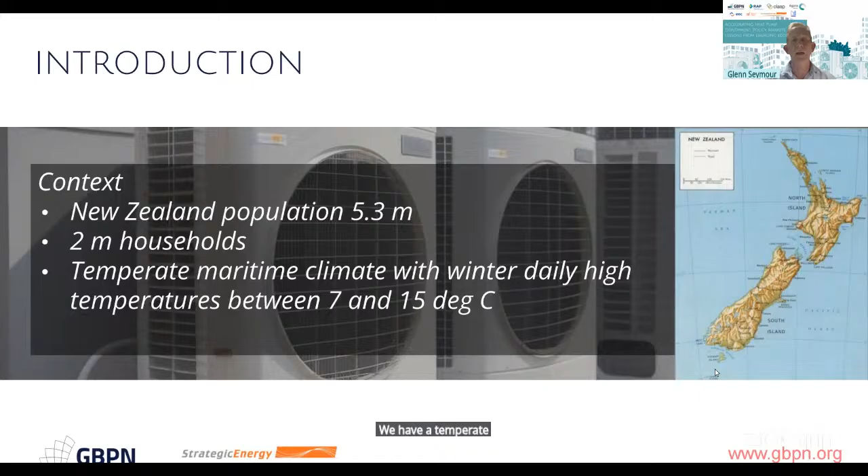Just a bit of context: New Zealand has a population of 5.3 million people spread across about 2 million households. Virtually everybody lives on the two main islands, imaginatively named the North Island and the South Island. We have a temperate maritime climate with winter daily highs between 7 and 15 degrees, and in the South Island where I live, it's quite common in winter for there to be a small frost. So yes, we do get some cool temperatures.

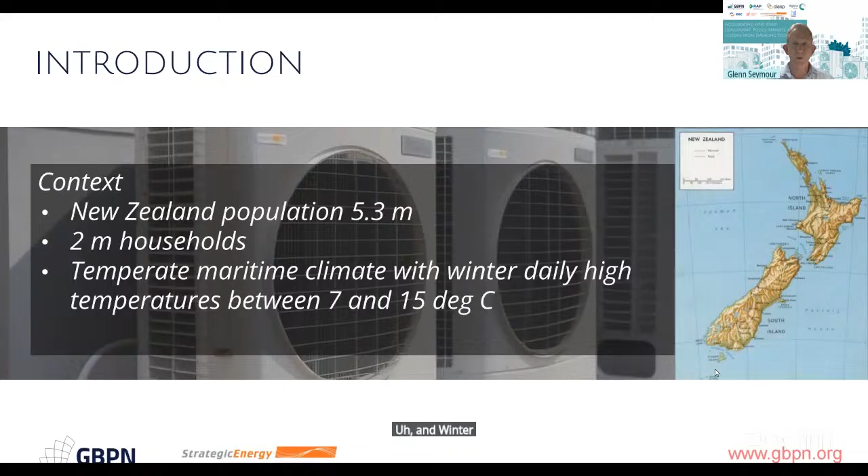Heat pumps are the dominant form of heating in the New Zealand market. We sell about 200,000 heat pumps per annum across New Zealand, compared to about 15,000 gas heaters and about 13,000 solid fuel burners. So heat pumps are well and truly the go-to form of heating in New Zealand. Approximately two-thirds of households use a heat pump as their main form of heating, and most new homes have one installed at the time of construction. This is due to the obvious energy efficiency and lower running costs of a heat pump. There have been a number of government policies, regulations, and incentive programs operating for over 20 years now that have promoted heat pumps as a clean, efficient form of heating. They're also very convenient and easy to operate.

The New Zealand market is predominantly a heating market, but in the northern parts of the country, cooling capacity is considered valuable in the warmer months. Given that heat pumps have been popular for over 20 years, we're now into the replacement market for older units that are failing or at the end of their economic life. In New Zealand, we tend to just heat the main living rooms of our house rather than having whole-of-home systems, so the majority of heat pump sales, 92%, are single split systems designed to heat one room. There's a huge range of options on the market, over 500 models across 21 different brands. Recent analysis of sales data shows the average capacity of a single split system is 5.7 kilowatts, or 12.5 kilowatts for a ducted system.

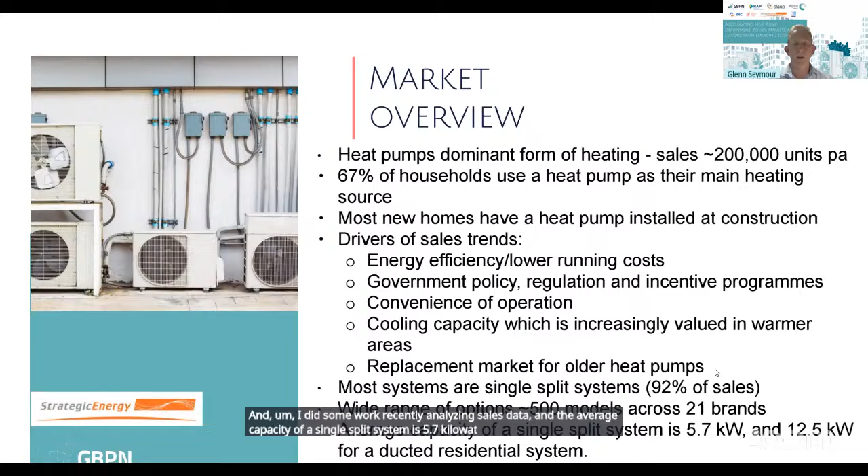There's a range of financial support available for heat pumps. Predominantly, the main source is the government's Warmer Kiwi Homes program. That's been operating for about 8 years, but there's been predecessors going back to about the year 2000. It's been focused on energy efficient and healthy homes for low-income households, requiring the home to be insulated and then to have a clean, efficient form of heating put in. There's 90% grants available if you're a qualifying low-income household, so that makes it a pretty compelling proposition to get a heat pump installed.

The home must be insulated, and the heating is for the main living room only. There's also been a number of local community grant schemes offered by a community, a charity, or an energy trust for heating and insulation. They are almost always focused on low-income households, and they typically align with the government's Warmer Kiwi Homes program and basically just offer a top-up. So in some cases, the heating and insulation is free.

A number of local councils have set up schemes around the country that I've been involved in, whereby they will advance the householder the money to install heating, insulation, solar panels, what have you, and they repay that advance back over their property rates accounts over 5 to 10 years. Those schemes are generally available to all homeowners rather than just focused on low income, and they're all similar but slightly different. And there's a new national ratepayer assistance scheme currently in development that will basically bring all those together under a single umbrella.

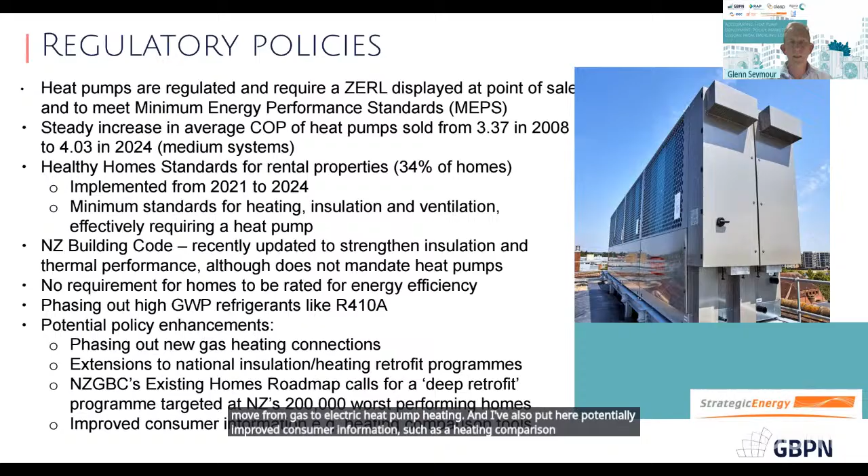There's no tax incentives available in New Zealand for heat pump installation. However, our 4 largest trading banks offer green home or warm home products, with mortgage top-ups at 0 or 1% interest rates for a few years to help install heating, insulation, solar panels, and so forth. Some of the larger heat pump retailers offer interest-free advances, typically 1 to 2 years, to help customers afford heat pumps. And some electricity companies also offer households assessments and assistance with insulation and heating.

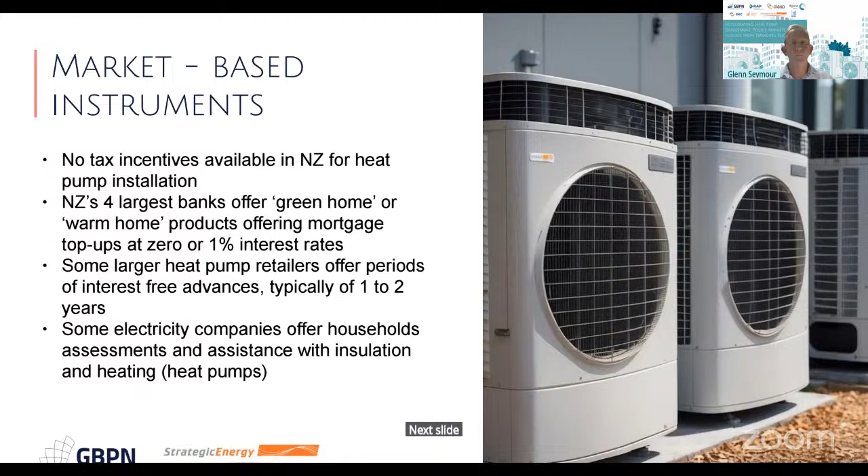The challenges in heat pumps are less than they used to be because it's now the dominant form of heating in New Zealand, so we've got a relatively mature market. But if I was to talk about barriers to purchasing a heat pump, I'd look at the capital cost. If you have to spend $4,000 or $4,500 on a single split system, versus an electric resistance heater for $100, there's a decision to be made balancing the short-term capital cost against ongoing energy savings through the much more efficient heat pump.

There have been issues in the past with poor quality sizing of heat pumps, which is absolutely critical to their performance and installation. However, the Energy Efficiency and Conservation Authority here has done good work over the last few years producing good practice guides for installation and sizing of heat pumps, which has helped address that. There's also potential challenges around electrical wiring upgrades that may be required in some cases.

The risk of power cuts is always something people have a perception of that, in my opinion, seems a lot worse than the reality. But nevertheless, it does make people think about electric heating. In some cases, if you've got an older home, it may be uninsulated, it may have a high ceiling, and it just might not be practical to heat with a 7, 8, 9 kilowatt heat pump, which might drive consumers to choose a solid fuel burner instead.

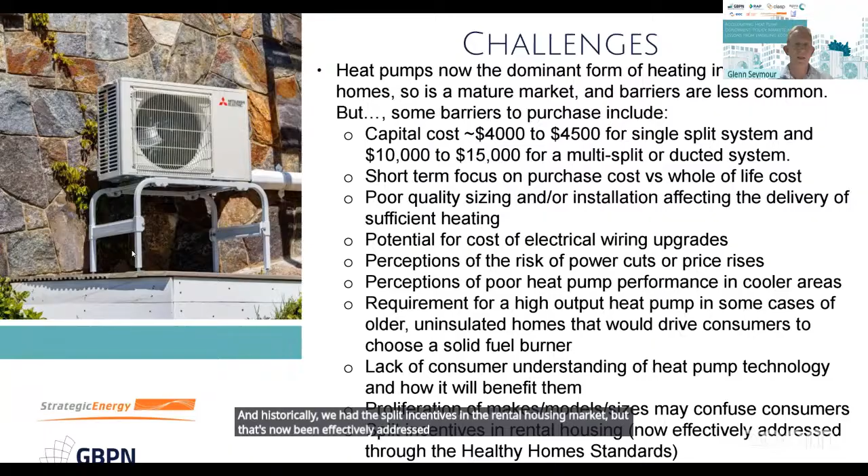So the opportunities: New Zealanders are finally waking up to the idea of having a whole of home heating solution, and ducted systems are gaining some traction. They've tripled in sales over the last 10 or 15 years.

There's the potential to extend government and other retrofit programs to include medium to high income households. We're certainly working towards increasing electrification and decarbonisation. And as was pointed out, the level of renewable energy in New Zealand is up there, with around about 90% of our electricity being renewable, so we're well placed for electrical heating.

We're slowly increasing the number of homes with solar photovoltaic systems, so it makes sense if you install a PV system to move to electric heating and use your own solar generation. Improved consumer information and labelling explaining the benefits of heat pumps, the replacement market I mentioned before, and residential construction activity are all highly correlated to the heat pump market and rising consumer demand for cooling.

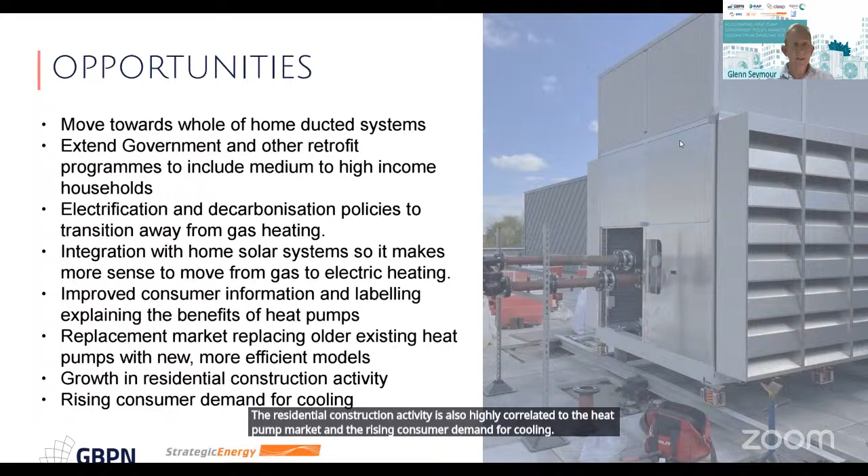Just some closing comments. As I mentioned, the market for at least single split systems for heat pumps in New Zealand is relatively mature - they're the go-to form of heating. There's still some work to be done on whole of home ducted systems. Regulations and government programs in New Zealand have really pushed the uptake rate of heat pumps and also their efficiency through regulations and labelling requirements.

However, there's still plenty of cold homes in New Zealand that need improved insulation and heating. I think the heat pump market can be further improved by some sort of national plan for decarbonisation and electrification, deep retrofits as the New Zealand Green Building Council is talking about, targeting a broader range of general income households, and promoting whole of home heating.

So that is my brief snapshot of the heat pump market in New Zealand. Thank you very much for your time.

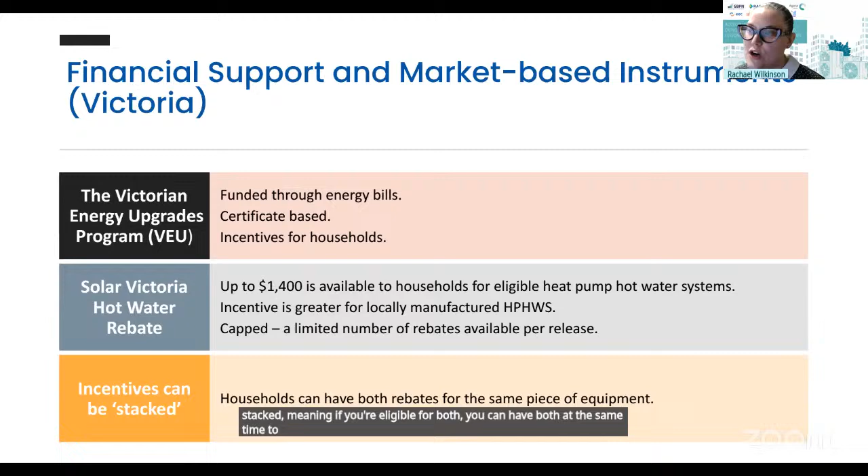The other thing to note about these two incentives is that they can be stacked, meaning if you're eligible for both, you can have both at the same time to reduce the overall cost up front.

Some other support mechanisms in place around the country: we've got the Renewable Energy Target, otherwise known as the RET, which is another certificate scheme similar to the VEU. It offers small technology certificates, or STCs, for heat pump hot water systems. These are available nationwide, and they are stackable with local incentives as well.

In most cases. The Australian government's also launched a Social Housing Energy Performance Initiative, otherwise known as SHEPI. It's an $800 million investment co-funded with states and territories, to become about $1.1 billion in energy performance upgrades.

These include installing heat pump water heating and heat pump for space heating and cooling in social and community housing. This is expected to impact around 100,000 properties with a mix of upgrades.

We've got some low interest loan schemes, including one that recently concluded in Tasmania, one running in the ACT. And nationally, we've also got the Home Energy Upgrades Fund, which is a federal program unlocking $1 billion in finance for energy efficiency retrofits. This one is generally aimed at larger renovation projects, but heat pumps are among eligible technologies.

So now we bring ourselves to the challenges and opportunities segment. I'm sorry, if you just bear with me, my screen's just done something funny and I'm trying to get it back. I'm back. So challenges for Australia.

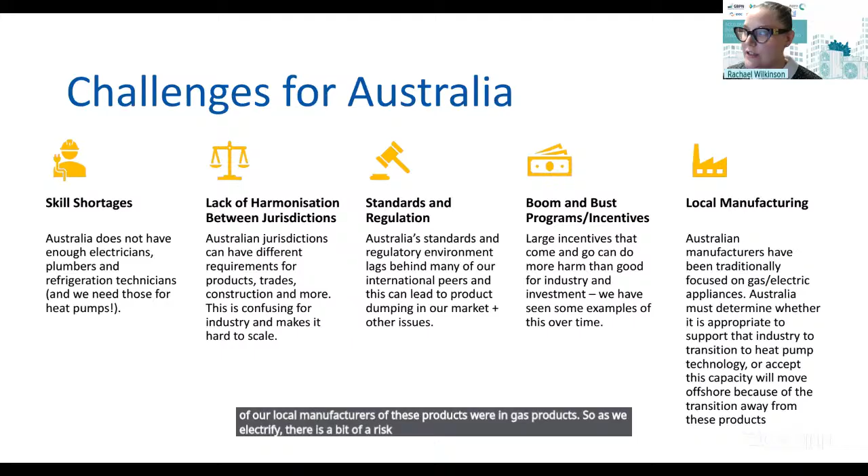We've also got some challenges with local manufacturing. A lot of our local manufacturers of these products were in gas products. So as we electrify, there is a bit of a risk to losing those manufacturers or that capability.

For our opportunities, electrification itself is a big option. There's a push to electrify everything. And I think that push is going to get a whole lot harder now. We're experiencing an oil crisis, I'm sure everybody on the call is thinking about that from where they are. So this itself is an opportunity, putting heat pumps in pole position for space heating and cooling and for water, and of course some industrial applications as well.

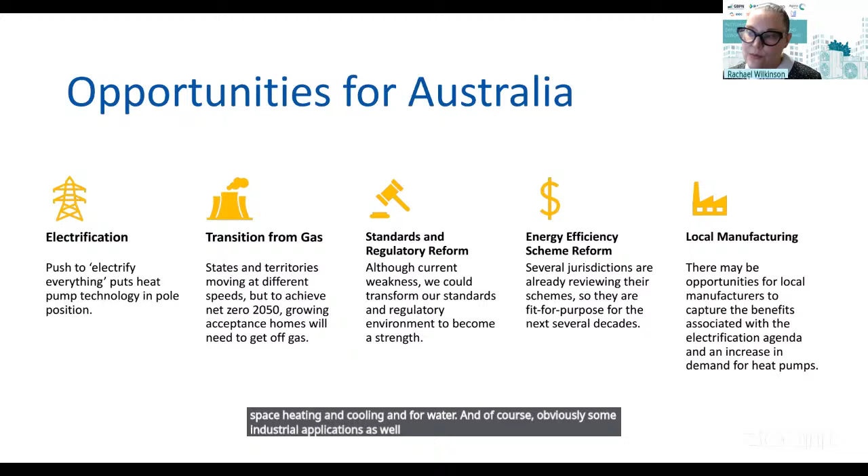Again, we've got a lot of states and territories wanting to transition away from gas, specifically to meet our emissions reduction targets. Victoria is no different, so there is an understanding that we need to do that. So this creates an opportunity for these technologies again.

We can reform our standards and regulatory environment and do better than we have been doing, and fingers crossed we see a bit of that in coming months. Our energy efficiency schemes have the opportunity to be reformed. The Victorian Energy Upgrades Program I was just speaking about is currently undergoing a major review so that it's fit for purpose into the future, to help with our electrification agenda.

And local manufacturing, whilst a challenge, is an opportunity. Among all that electrification, there is a chance to bring our local manufacturers along with us and unlock opportunities there. So that's it from me. Thank you.

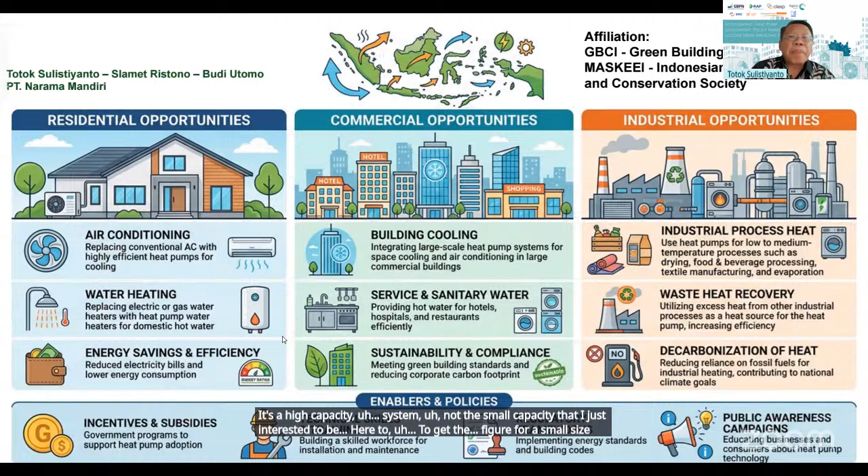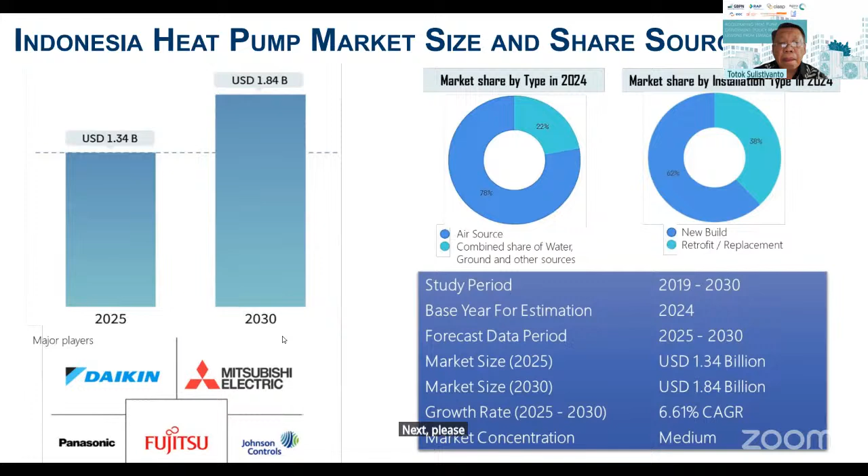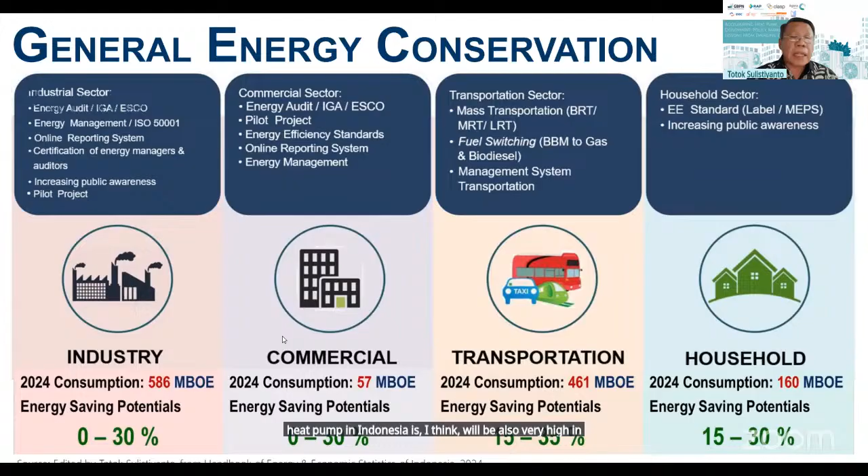So this is the base for energy conservation regulation. Of course, it will be related with energy conservation implementation. It's not only downstream, but also upstream, started from upstream management and downstream management, and then conducting the energy conservation there will be several regulatory ministry regulations. It's supposed to be like 6 or 7, more technical and so on, obligation to carry out energy conservation for the downstream side, and then also parties that conduct periodic energy audit.

Energy conservation financing now is also becoming attention for the government. And then business development, ESCO model, and so on is also part of the regulation. And then cooperation on the field of energy conservation. I think many international funding right now is supporting the government regulation, and of course facilities incentive and disincentive also part of important regulation.

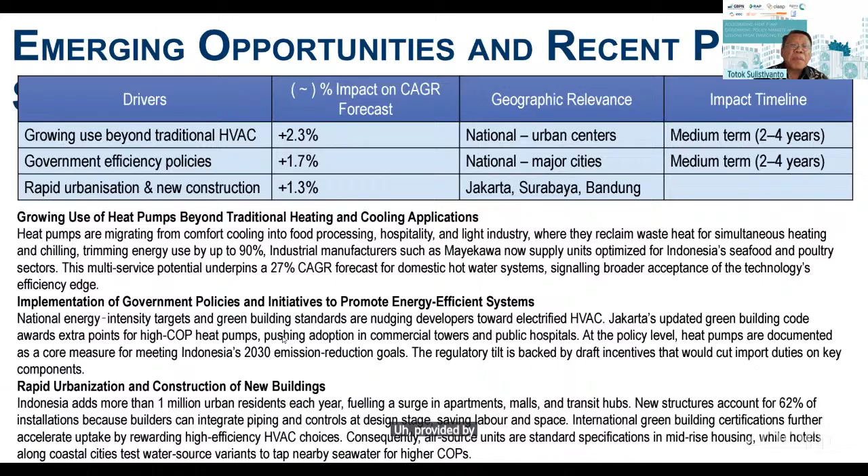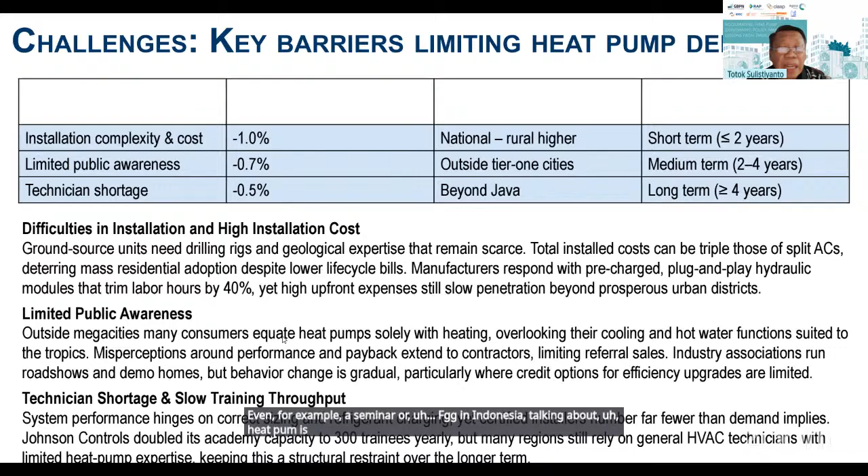So challenges and key barriers limiting heat pump deployment: of course installation complexity and cost, investment costs. I don't think ground source technology is more appropriate - it's very expensive. Currently, as I know, in Indonesia only air source heat pump is implemented, especially in hotels. Limited public awareness, and then I will include some case studies in the last presentation. And then technician shortage and slow training throughput - even though, for example, seminars or FGDs in Indonesia talking about heat pump have already been conducted many times.

Heat pump application is especially implemented in industry and building, like terminal reheat, domestic water heating, and dehumidification. For example, many hospitals that want to be certified for green building - I think it's very appropriate to use heat pumps because of high humidity; we can use dehumidification for heat pump.

Also, our project will be approved by the owner because this is new technology - it's not easy to convince the building owner to buy new technology. Recent industry development, like Daikin and other brands, is already prepared with new refrigerant, for example R32 and so on.

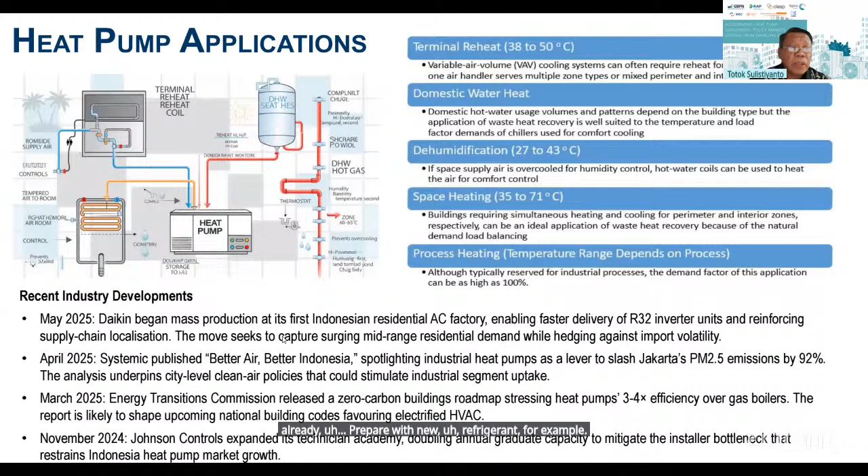Also still in Bali, in Andaz Hyatt Hotel, is also air source heat pump. Then the last example is... next please, I think.

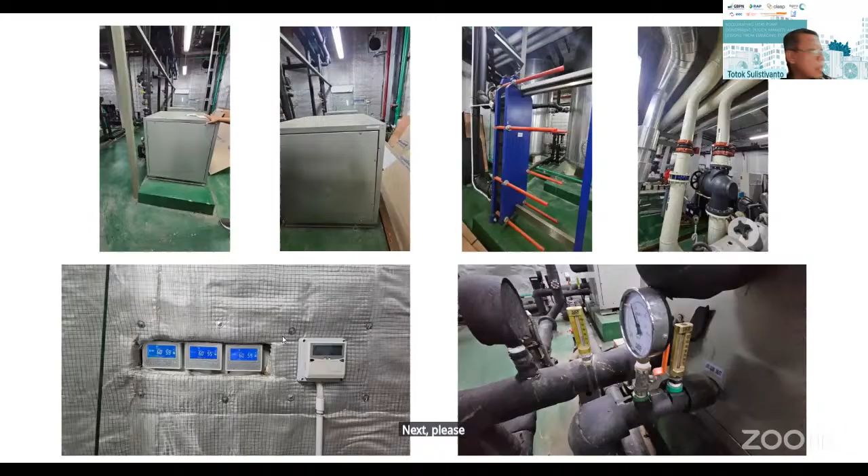Oh yeah, this is installed in Central Java. The last technology - this is in a small hotel in Central Java, and I think it's relatively new, installed last year or this year. You may see it's replacing a boiler in messy condition with a very big size, and if you replace it with the heat pump, it's only small - maybe 1/4 of the area you need for installation.

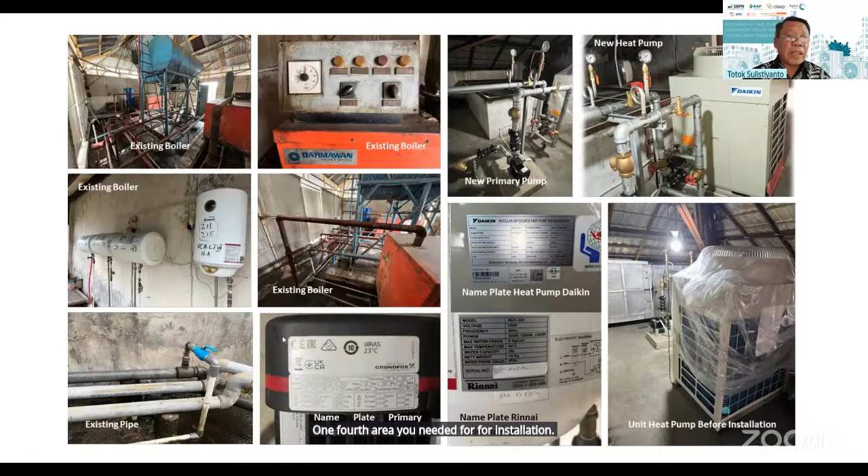I think that's all from my presentation, and back to Rehema. Thank you very much.

Thank you so much, Totok, and thank you for the examples which puts everything into context, and for even highlighting how cooling is moving from just housing, or heat pump use is moving from cooling in houses to now under industries like food processing, hospitality, and others.

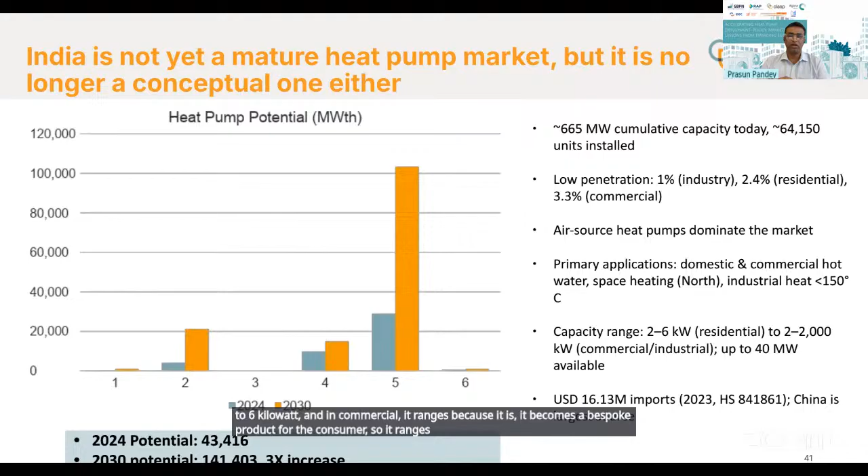Applications that we found in Indian markets were largely around hot water, space heating in the northern part of India, and industrial, though that was pretty non-existent. There is very limited domestic manufacturing of heat pumps in India, and we tend to import most of our heat pump technology solutions largely from China. In the residential segment, sizes are pretty small, 2 to 6 kilowatt, and in commercial it ranges from 2 to roughly 2,000 kilowatt since it becomes a bespoke product for the consumer.

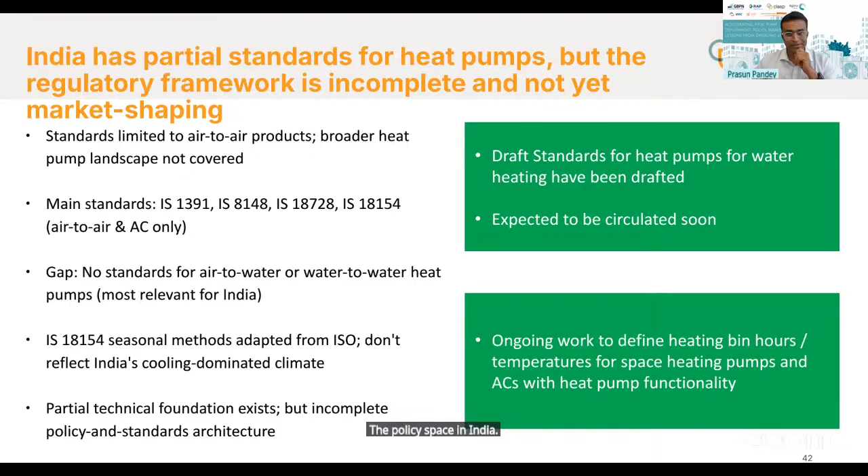Now talking about public finance or financial incentives - you would not find any dedicated program, incentive, or concessional finance of any sort for heat pumps in India, be it any use case. But our research has indicated that in some industrial and small and medium enterprise related efficiency programs, heat pumps could be included. If someone wants to go for them, they might be eligible for certain concessional finance, but these have not been specified very clearly.

Our study did highlight that upfront cost is a major barrier for all consumer types in India, and payback ranges from 1 to 9 years. Obviously in the case of industrial, the payback is far smaller, but in residential the payback is pretty long. The reason is that a typical electric resistance water heater type is available for a fraction of the cost - that is the big deterrent.

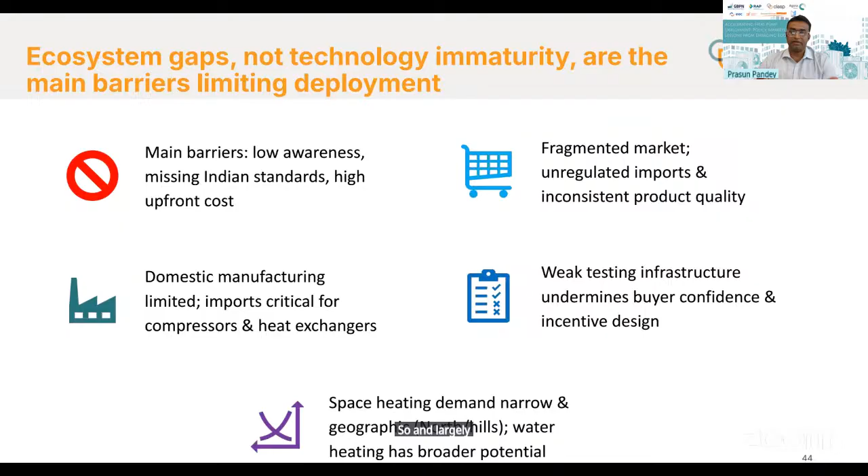We assessed the potential for heat pumps in India, looking at 2024 and 2030 potential. Our analysis suggested that India's potential for heat pumps jumps three times from 2024 to 2030. If you look at 2030 potential, water heating is the major use case - almost 80% of the potential we assessed belongs to water heating, and within that segment, residential is close to 87%, followed by commercial.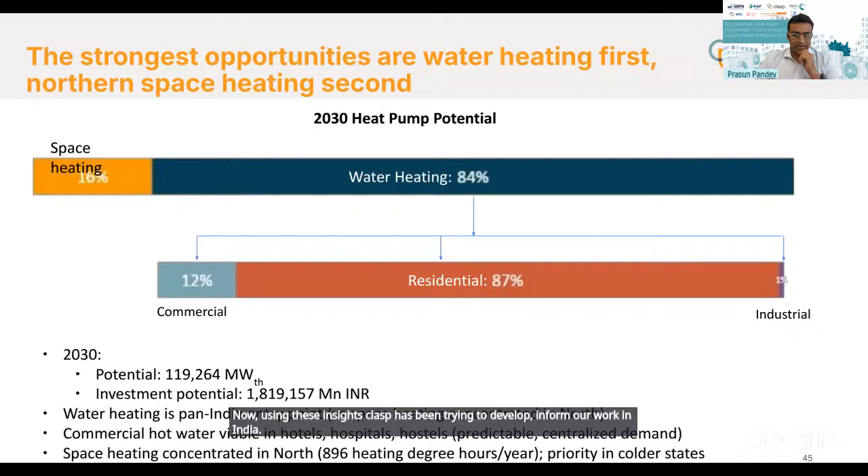Now, using these insights, CLASP has been trying to develop and inform our work in India. I'll talk about that in the next slide.

Having recognized that residential water heating is the most dominant use case for heat pump adoption in India, we tried to look a bit deeper at what barriers are hampering their adoption. The first and foremost, as I covered previously, is lack of awareness about the technology among residential consumers.

The second issue we realized, like in the commercial segment as well, is that end consumers such as hospitals, hotels, and other commercial establishments don't necessarily know about and decide on this technology. The market is still driven by consultants and architects who advise them on how to design facility building management, so there wasn't much awareness among those consumers or consultants.

And the third and most important issue is the missing ecosystem - there was no certification about performance, safety, and those kinds of aspects.

Recognizing these challenges, CLASP has been working in the past 1-2 years with stakeholders in India to assess the potential of labeling such technologies. Why would labeling help? Because once a product is labeled, it would help build consumer confidence in the technology. If the product is tested well enough in laboratories, it would signal safety and reliability, and the label can also spur a whole lot of other market actions.

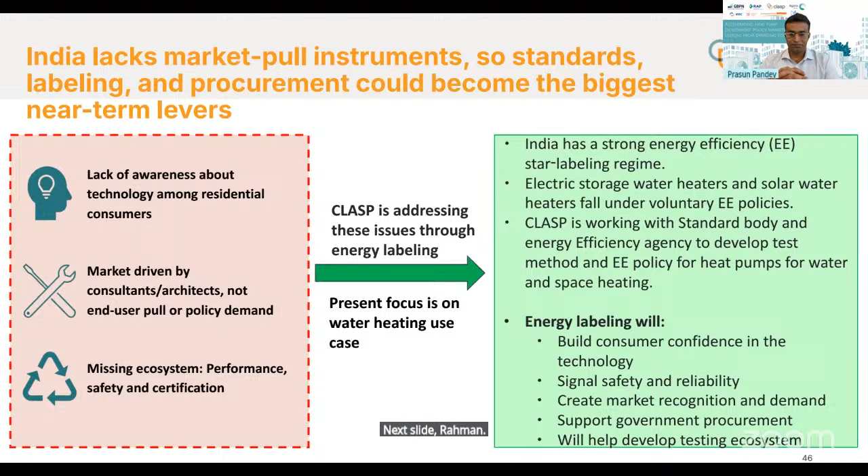Now, having largely covered the water heating use case in India, if we look at the future that holds for heat pumps in India, it is essentially driven by multiple country-specific priorities.

While India is adding renewable capacity to its grid very rapidly, our assessment did also hint that most of the industrial process heat is still fossil driven. This creates a huge opportunity in India for heat pumps - we can essentially explore heat pumps for electrifying the process heat requirements in industry.

The second consideration for India is electrification. As we speak, India's electrification is slightly on the lower side, and especially in the case of industry, it's just 17%.

Heat pump is a very opportune solution for India because it can help deliver multiple competing priorities through one solution. One is essentially electrification and energy security, because as we increasingly deploy renewables in India, we would be replacing fossil fuels with electricity. Efficiency is another benefit, as heat pumps tend to deliver 300 to 500 percent efficiency compared to typical solutions.

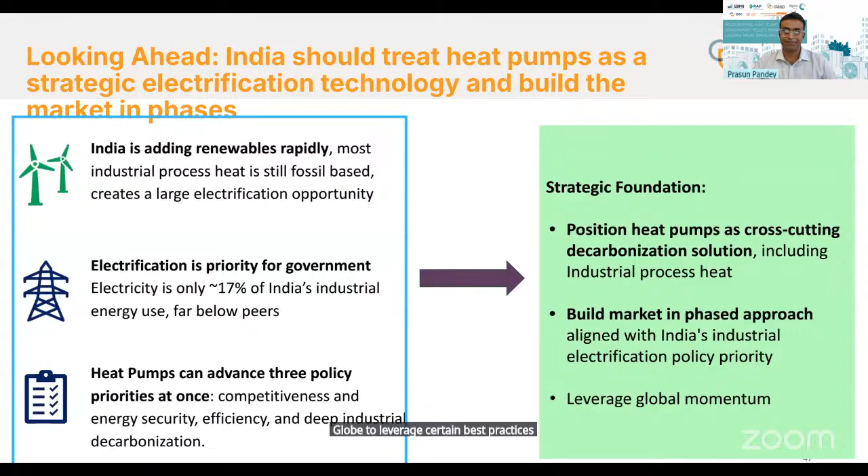The good thing with heat pumps is that there is a whole lot of global momentum on heat pumps across Europe and other countries. We could leverage the interest and activities in other parts of the globe to adopt certain best practices for India. With that, I conclude my presentation, but I'm open to questions.

Thank you, Rehma, and good afternoon everyone. My name is Piyatida. Today I would like to share the overview of the Thailand heat pump market landscape and policy framework. Next, please.

First, I want to draw your attention to the background on air conditioning systems and heat pumps. Thailand is a key global manufacturing center for air conditioners; we are the third largest exporter of air conditioners, following China and Mexico. The main player for the domestic market for air conditioners is the residential sector. But when we talk about heat pumps, most people in Thailand tend to associate them with hot water applications, not cooling applications.

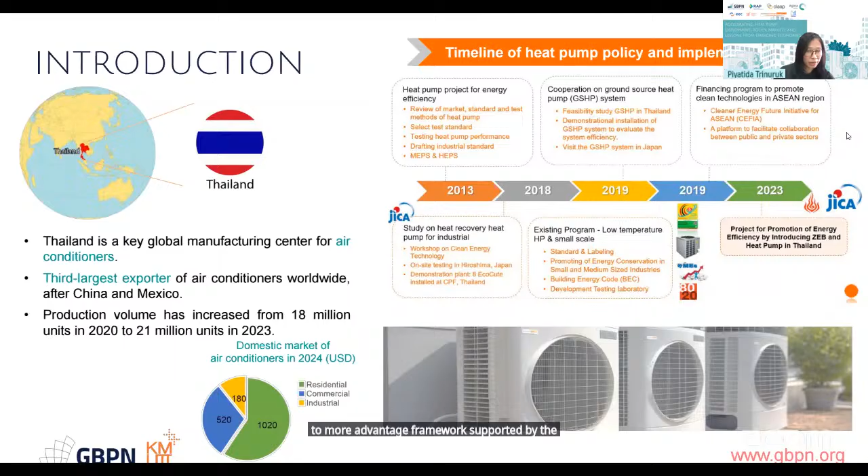The development of heat pump policy in Thailand began around 2013, as shown in the map. This program was started by the Department of Alternative Energy Development and Efficiency, or DEDE, which is under the Ministry of Energy. The policy landscape has developed significantly from the initial energy efficiency initiative to a more advantageous framework supported by international collaborations. Next, please.

For the overall market of heat pumps in Thailand, it seems to have experienced significant growth. You can see from the chart that a large portion, around 80% of the market share, is dominated by overseas brands, for example from Japan, China, and the United States. For local brands, we have only 20% of the market share. This is because of the positioning between cost-driven China manufacturers and the well-established Japan and United States brands, and this has created a clear market gap, particularly in the high-capacity industrial system.

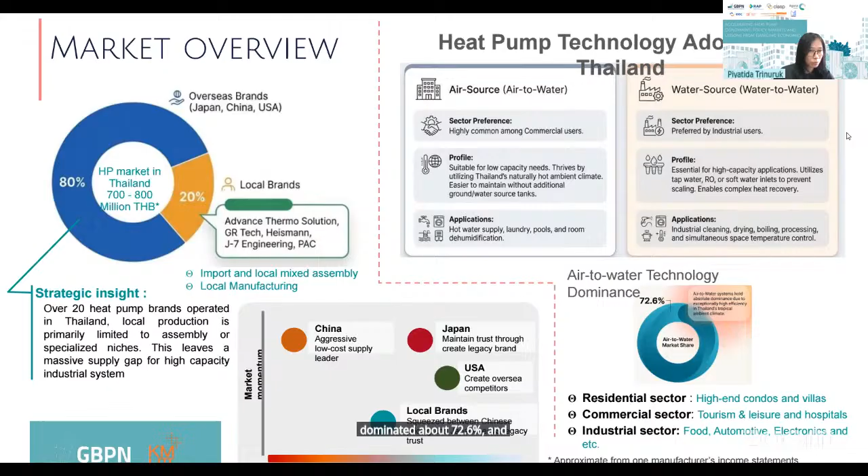For heat pump technology in Thailand, most of them are air source heat pumps. This technology dominates at about 72.6% and is highly prominent in the commercial sector. Next, please.

To strengthen the adoption of heat pumps in Thailand, the MEPS, the minimum energy performance standard, and the HEPS, the high energy performance standard, have been implemented. The MEPS is mandatory, regulated by the TISI, the Thai Industrial Standards Institute. This standard acts as a safeguard to prevent low efficiency equipment from entering the market. On the other hand, the HEPS is represented by DEDE, representing the high efficiency level. This is a voluntary program designed to promote high performance heat pumps by targeting the top tier of heat pumps in the market.

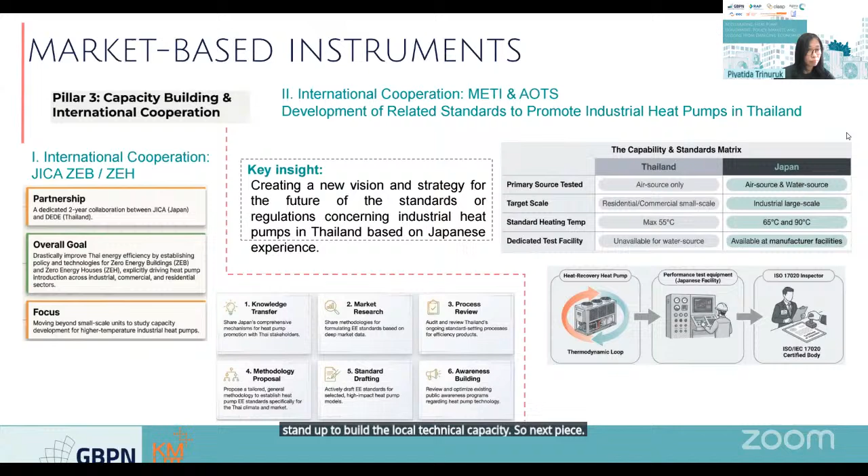However, there are still some challenges in the heat pump market, especially the high initial investment cost. This is quite important, I think, even in Indonesia and India, along with limitations on testing capacity, as right now we are limited to small size heat pumps. The last one is about knowledge - we are still lacking knowledgeable engineers and specialists in system integration and design.

So to drive the heat pump market, I think the important thing is to promote projects that can achieve a payback period lower than 7 years, and also introduce sustainability by reducing CO2 emissions. One such project is using the heat pump by replacing fossil fuel boilers. The last point is to give people knowledge about what high efficiency heat pump technology is.

Regarding the opportunity in Thailand, right now in the commercial sector, most - about 90% - has already adopted heat pumps, especially for hotels, hospitals, and rentals. But on the industrial side, it's still a challenge for heat pump technology.

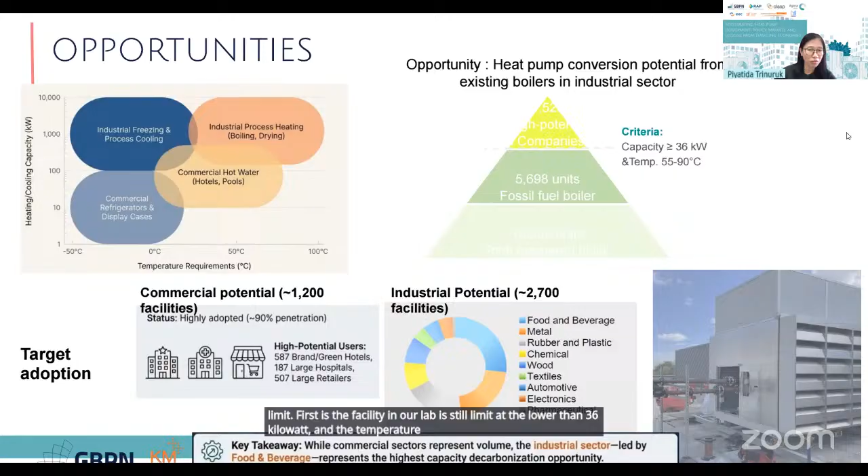Before I stop my talk, let me leave some messages on how we can accelerate industrial heat pumps in Thailand. First, a clear policy roadmap should be addressed, especially for heat electrification. Second, the incentive scheme is quite important. Third, readiness in the local supply chain is needed. Even though we have many air conditioner manufacturers, the local supply chain for heat pumps is quite limited. Another thing is capacity building in human resources, especially for industrial heat pump system integration.

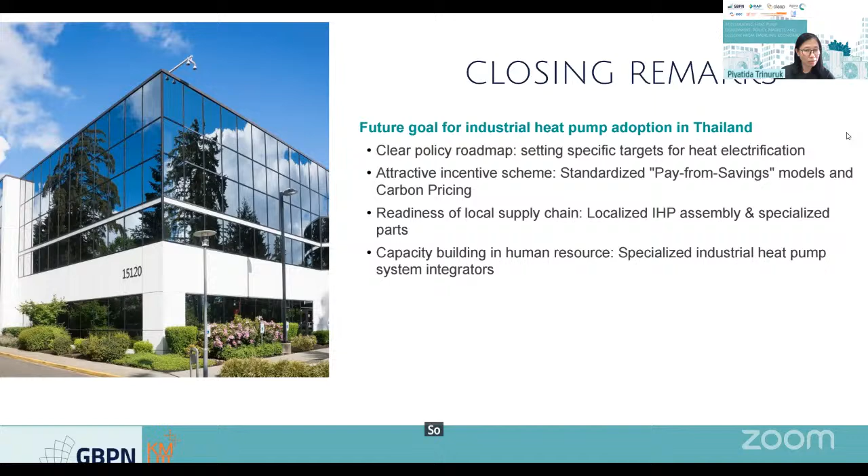So thank you for your attention.